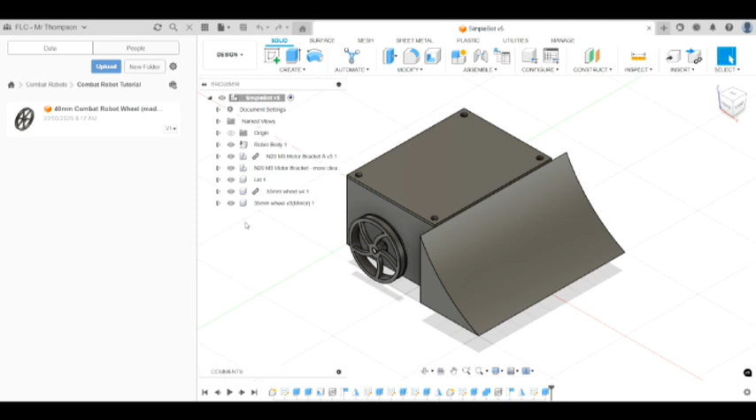G'day, this is Mr. Thompson, and this is a video for my Wednesday robotics group, and we're going to build this combat robot. Now, this is a good robot to start with. It's a wedge robot, so it doesn't have a weapon. It's just like a sumo robot. It just pushes other robots around. So it's got this scoopy thing on the front, it's a 150 gram robot, and it's a really good one to start with.

In fact, if I hide that lid there so we can see inside, you'll see we've got some motors and brackets in the side there. Don't worry, you don't have to build the model for the motor. I'll give you a file for that. Somebody else has done that for us, but you'll build the body of the robot in this tutorial. I'm probably going to break this tutorial down into 3 or 4 parts, so it doesn't get too long. And in this first part, we'll create the shell. We'll create the body of the robot.

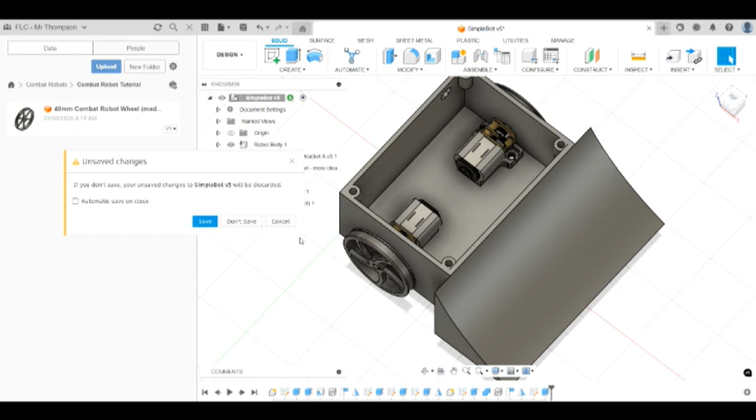All right. Now, let me just point out over here. I've created my own little folder because this robot will have a few parts to it. I'm assuming you've already built the wheel, which is what I showed you last week, how to make a robot wheel. And we're going to include that wheel in this project here. So I've created a folder. You could create a new folder or a new project if you want to as well. So anyway, let's get started. I'll just close that. Actually I don't need to save anything on that one.

Okay. So we've started with a new model, a new design. You could have gone File, New to do that, or when you just open up Fusion, it'll be ready to go with a new model. Now, because this robot is going to have multiple components, rather than just go ahead and start building the body, I'm going to create the body in a new component. The way to do that is to click on New Component here. We'll call it the robot body, like that, and go OK. And you can see now there's a component there. So rather than just create sketches under the root level, I've created a new body because then we'll add 2 wheels to that. So there'll be a bunch of different components in this assembly.

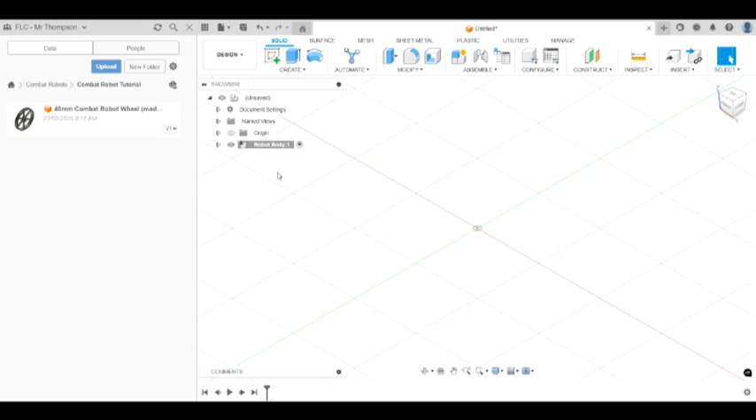Now that we've created the body, I guess now we can create a sketch. I'm thinking I probably want this robot to be facing down to the right in the home view. So I create the sketch on this plane here to start with, like that. Now, if you don't have a mouse with a wheel on it, you'd do well to get one. If you're in my classroom, we've got some spare mice with wheels on them. It just makes zooming in and zooming out so much easier. So do yourself a favor, get yourself a mouse with a wheel on it. You can pinch the trackpad on your laptop, but it's a bit painful.

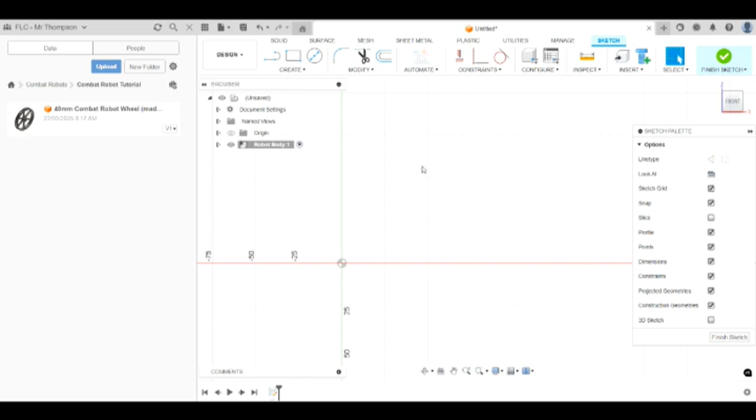All right, so I'm going to create a rectangle. I can either go Create, Rectangle, 2-point rectangle, or I can just use the letter R on my keyboard. So let me just do that. R on my keyboard, there's a rectangle. I'm going to click on the origin, and then, before I click anywhere else, I know the dimensions of my rectangle. So I'm just going to type 60 and then tab to go to the other dimension, and that needs to be 40. So like that. When you draw a rectangle, you can draw first and then dimension later, or you can dimension as you draw.

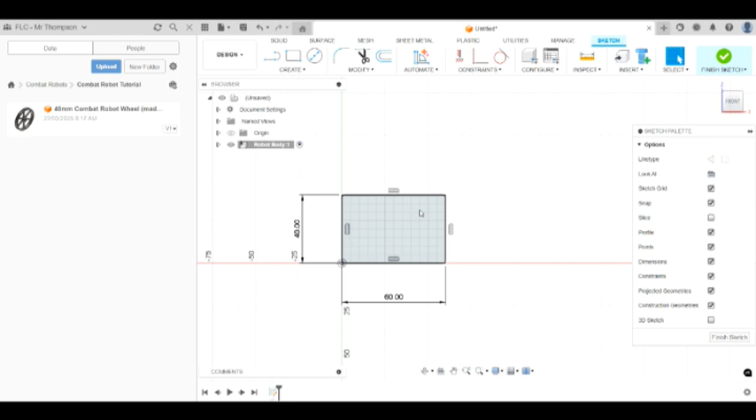So I've just dimensioned as I've drawn then. Okay, so that's the start. Now, I guess I want this scoopy bit on the front here. So I want a circle. So let me just do that. So I'm going to click here. I'm going to click out here anywhere. I guess it doesn't really matter where. And I'm just going to draw a circle, and I don't even care what size the circle is yet.

So escape. Let's see. I want that circle to line up with that point there. So I want the edge of the circle to line up with that point. So I can use this constraint here called a coincident constraint. And if I click on that, I can click it there or I can click it there, either way. So now if I click on the circle and then I click on that point there like that, can you see now if I press escape a few times so I'm not doing that anymore.

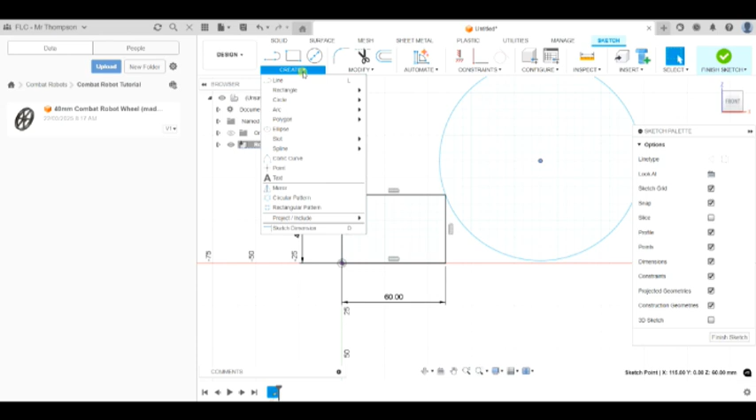See, I can move that circle around, but however I move that circle, it's going to keep the edge of that circle on that point. So that's good. Now I probably need to make another constraint down here. So let me draw the bottom of the scoop here. So I'm going to use L on my keyboard for line. So again, I could do create line like that, or just use L on the keyboard.

So let's do L on the keyboard, L, and I'm going to click there. And I'm going to come out here. Oh, now I know how far I want to go. I want to go 40 millimeters, like that. Oh, and not to there actually. I want it to go there, like that. Okay, can you see that's automatically put a horizontal constraint on, so that line's horizontal. So that's why it's gone black.

It's fully constrained now. Okay, now I guess what I want to do is I want to put another coincident constraint. So a coincident constraint like that. Now I've already got that point selected, I think. So all I probably have to do is just touch that circle there. There we go. So now if I press escape a few times, now if I try to move that circle, I can still move it, but can you see it's always keeping it on that point there and that point there. So that circle's not fully constrained yet, but you can see it's already doing that.

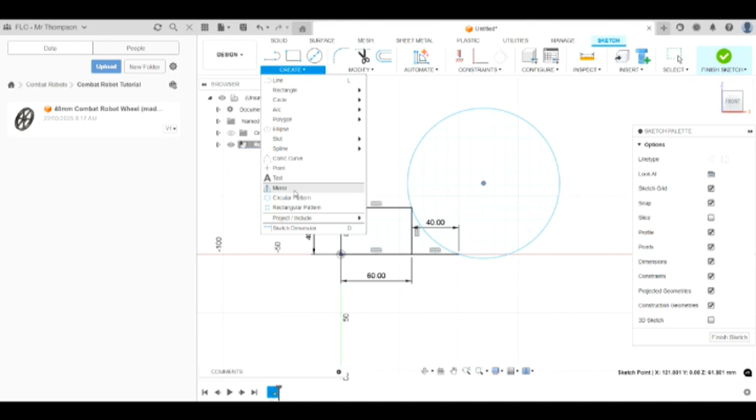Now, I think to fully constrain it, I'm just going to put one more dimension in. So D for dimension, D on my keyboard, or I could do create dimension like that. Okay, so D on my keyboard, click on the center of the circle, and then click on, well, I could click on that. I'm going to click on the origin. And you can see it's giving me all sorts of options as to where I could put my dimension.

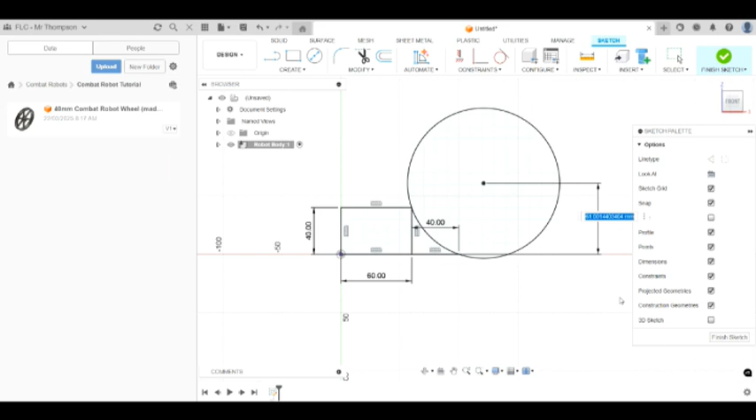I'm going to put my dimension over here because I want that distance there to be 80. And I found if I do that, then that gives my scoop a nice shape. Okay. All right. Now I'm going to press escape so I'm not dimensioning anymore. And now I'm ready to extrude. So if I press E for extrude on my keyboard, that section there is the first thing I want to extrude.

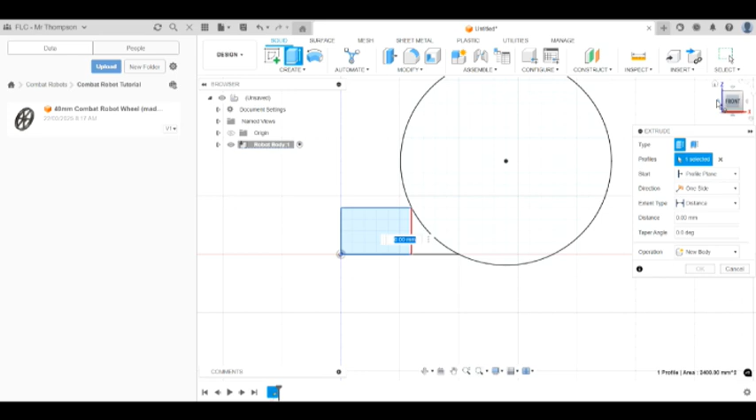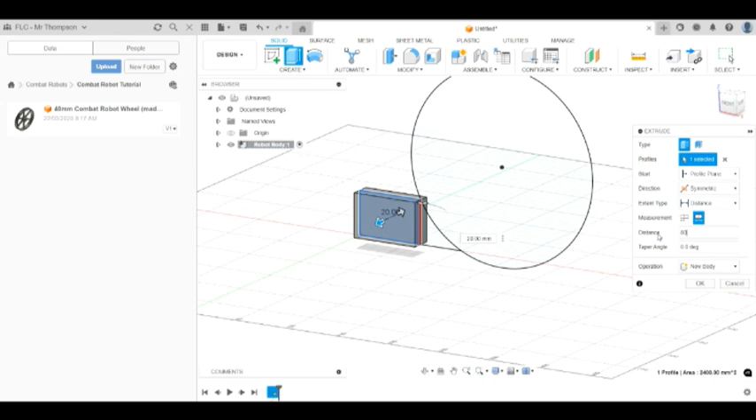And let me just rotate my view a little bit with my view cube so I can see what's going on. I want to extrude symmetrically both sides. So I want it to come out both. See how that's extruding from the center, both sides out. Okay, and how far do I want to come out? Well, actually, I want the length of the whole thing to be 80 millimeters. So if I click on this whole length like that, and then type in 80 millimeters, okay, that means it's 80 from that side all the way through to the other side there.

If I used this button here, that would make it too wide, because that would mean it's 80 on both sides, a total of 160. But that's not what I want. I want both sides together to add up to 80. All right, and that's going to be a new body, which makes sense since I haven't got any bodies yet. So click OK.

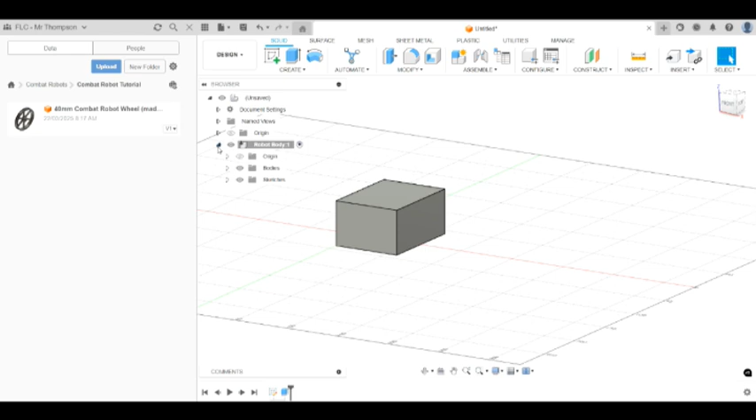Now my scoop picture is gone. That's okay, I can find it. What happened was once I did an extrusion, Fusion thought I was finished with that sketch, but I'm not, so Fusion turned it off. I'm just going to turn the visibility of that sketch back on again, like that.

You know what, I'm actually going to name that sketch too. Let's call that the side, robot body side profile. Okay. I don't always do that, but it's good practice to name your sketches, bodies, and components so it's easy to find them later if you want to make changes. If I was doing everything properly, I'd probably name all of them, but I get a bit lazy sometimes and don't do it. I'll see if I can remember.

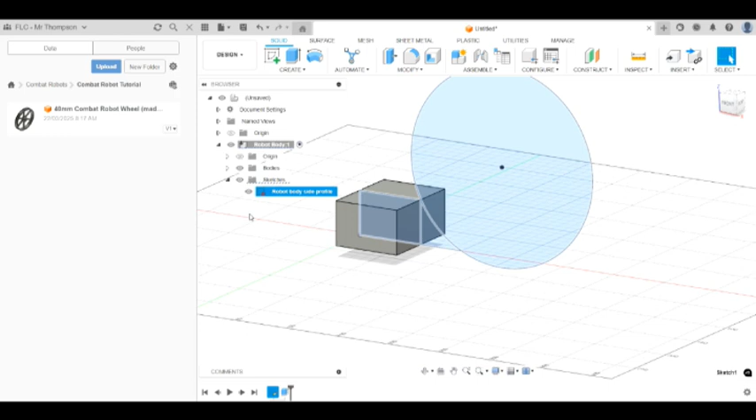Okay, now let's see that. So that's turned back on again. Now you can see there's my circle, and you can see the rest of my sketch.

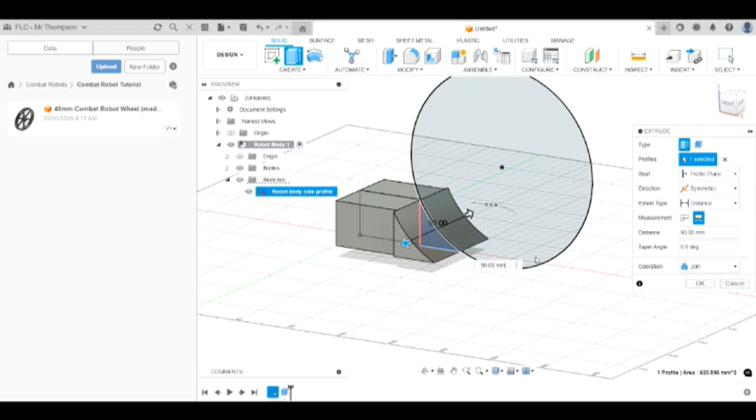Now I want to extrude again, but I want to extrude this section. So if I click on that section and press E for extrude, again I want to do a symmetric extrusion, using the distance of the whole length, and that whole length needs to be... actually I'm going to make the whole length equal to 90. 90, enter, like that.

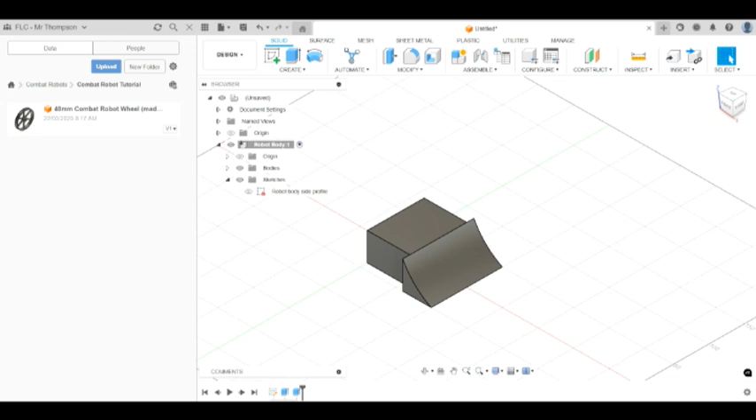You can see that leaves a bit of room so I can hide my wheels behind the scoop there, and it looks pretty good. So that's what I'm going to do. Now we don't need this circle anymore, so I can turn that sketch off, like that. The sketch is still there, but we can't see it because I've turned the visibility off.

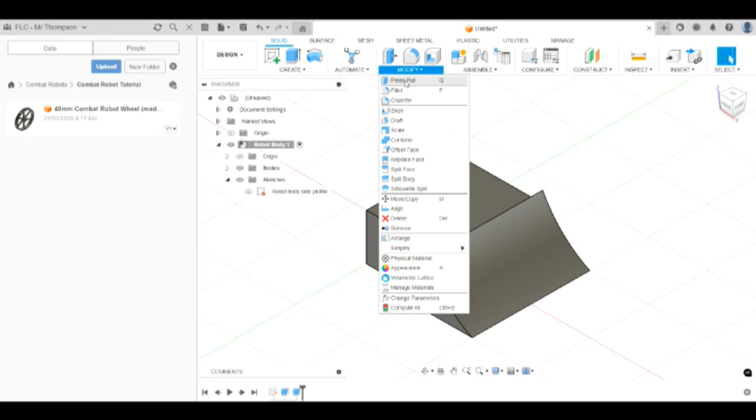All right, that's good. So here we go. Now this is a solid object. If I 3D print that, I've just got a block of plastic, and that's not what I need. I need a shell that's hollow on the inside. So I'm going to use this tool up here, the shell tool. You can find it on your toolbar, or you might have to go to Modify and Shell like that. It doesn't have a keyboard shortcut, but we'll just click on Shell.

Now I'm going to click on this top face here. Actually, let me do the rest first. I'm going to select the shell, and I think I'll leave this as default. I'm going to press 2 because I want a 2mm shell, and my shell wants to be inside. That is, my original shape that I drew remains as the outside of the object, and it makes a 2mm shell on the inside of the object that I just drew. If I clicked on outside, it would make my whole object bigger than before, and I don't want that, so I'm going to click on inside.

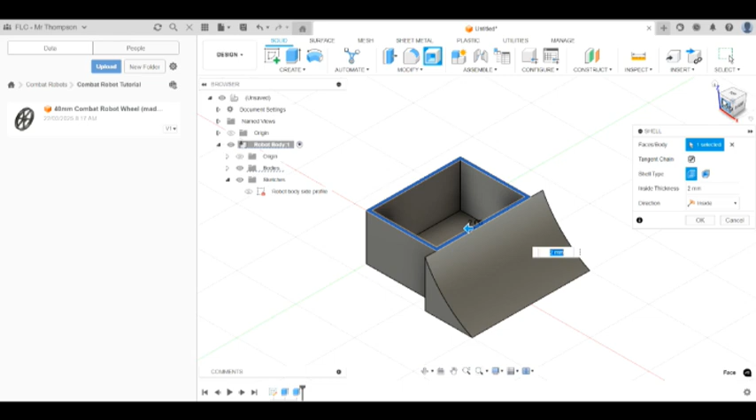All right, now let's see. Yeah, that'll do. I'll click OK there. And now if I rotate around, can you see inside here it's all hollow? That first face that I selected, it's actually taken that face away, and made all of the other faces of my solid into a shell. So that's good, that's exactly what I want.

All right, you know what, that might do for this video. We'll continue on in the next video.